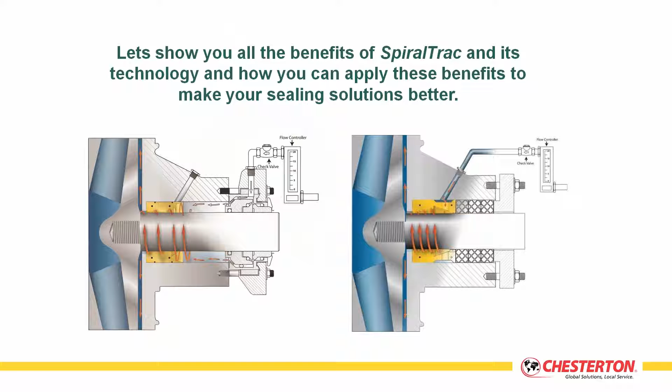So what we're going to start off with today is all of the benefits of SpiralTrac and the technology, and how you can better apply these benefits to make your sealing solutions better for your customers. We'll cover the basic operation of SpiralTrac, talk about flush - when and how much you should be using - sealing options, packing options, and a few preferred materials we tend to use when dealing with mining applications and tough abrasive slurry applications.

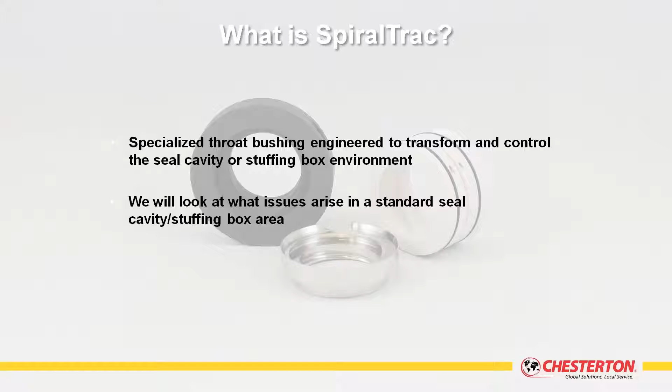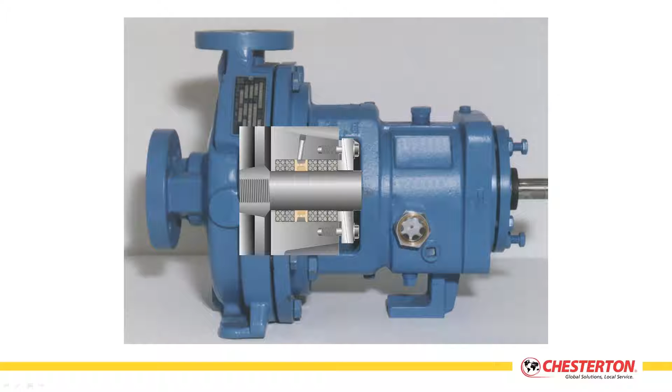So as far as what is a SpiralTrac - when we talk about a SpiralTrac, we like to call it an active throat bushing. It's a specialized throat bushing engineered to transform and control the seal cavity area in and around the stuffing box. We're going to look at some of the issues that arise in a standard seal cavity stuffing box area.

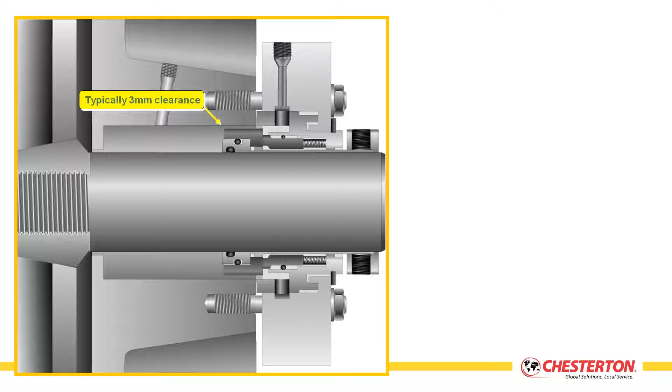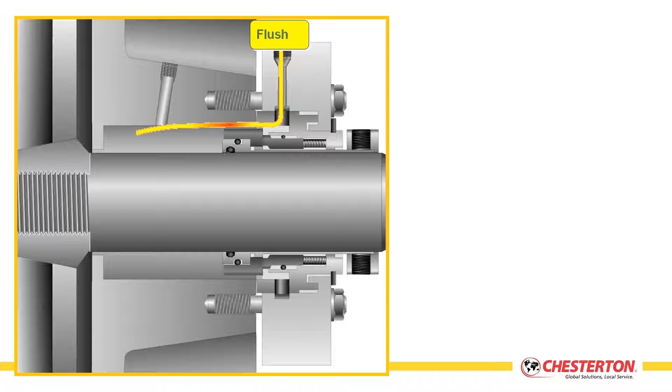This is the area that we at EnviroSeal are most concerned with, the stuffing box area. A lot of times you're taking an application that may be upgraded to a mechanical seal that was previously packed. Some of the issues that arise are that these stuffing boxes are made with smaller cross sections for packing. So when you get your mechanical seal in there, a lot of times there's not a lot of room for circulation inside the stuffing box, whether you're using a single seal, a double seal, or whatever you're trying to upgrade to.

So what are some of the things we're trying to do to help protect these seals in tough abrasive applications? You use a high volume of flush to help keep the seal cool and to try to create at least 15 feet per second velocity underneath the throat at the bottom of the box, to prevent solids and abrasives from getting into the area where they can be harmful to the mechanical seal.

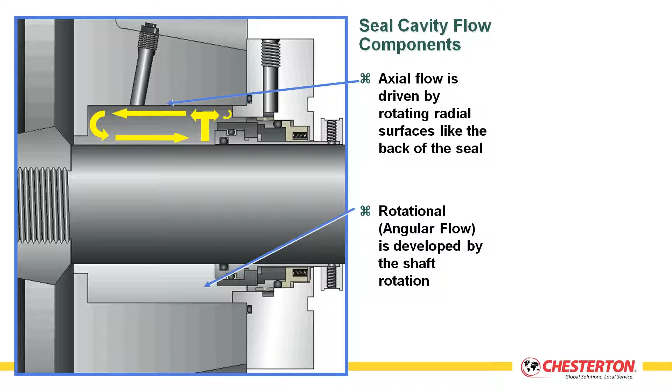So what's happening inside these stuffing boxes is that you have different types of flows going on. You have axial flows and you have rotational flows. These rotational flows are developed from the shaft's rotation. Once the pump starts up, centrifugal force takes these rotational forces and drives them around the stuffing box.

But you also have axial flows, coming off surfaces, like if there's a step in the shaft, the end of the mechanical seal, or maybe the impeller hub extending inside of the box. So these flows are actually directing the rotational flows back towards the mechanical seal, and they're just circulating around inside the stuffing box area.

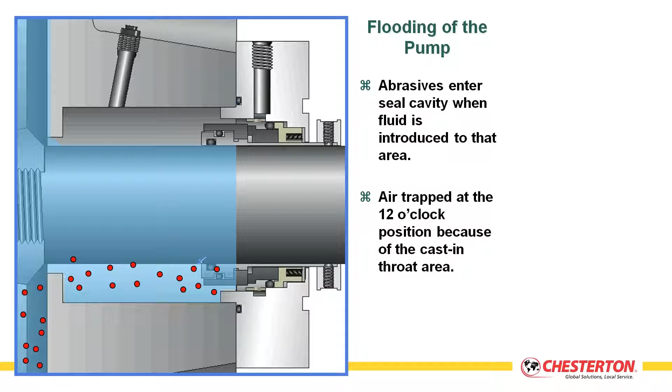So when you flood a pump, getting ready to start it up, what can happen is your abrasives and slurries enter the seal cavity, and you end up with an area that can be airlocked. All of this air can be up to 20 to 30% of the stuffing box area. You can have a big volume of air trapped inside the seal cavity.

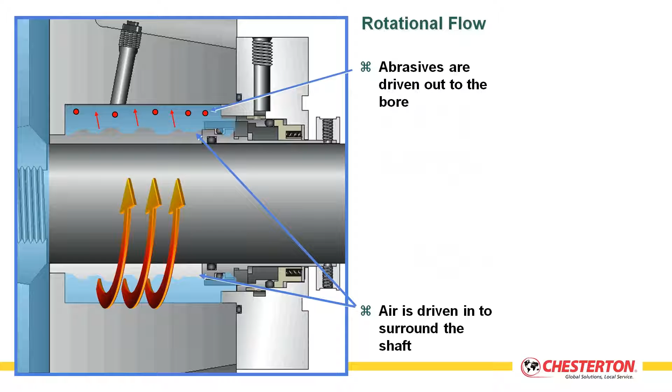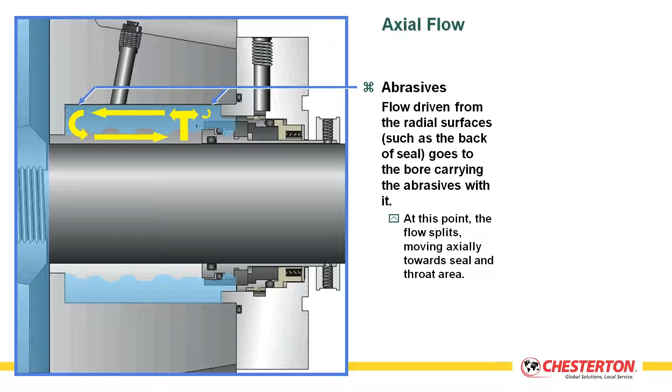When the pump is turned on, the heavier solids are driven out to the bore of the pump, while the air is drawn in towards the shaft area. This is problematic because your elastomers, your O-rings, can end up heating up, not being lubricated properly. So now what we have inside the seal cavity is an excess of air, and solids essentially trapped inside there, circulating around and coming back towards the mechanical seal.

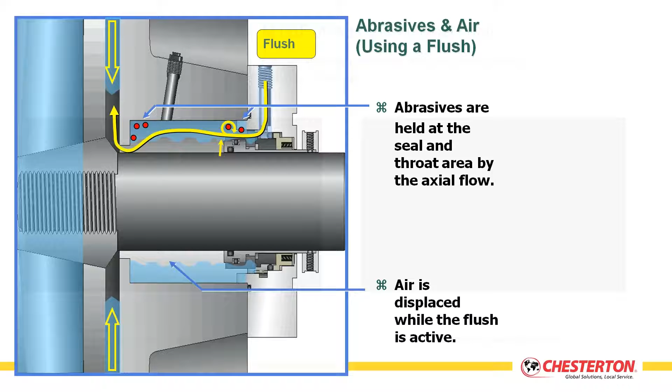So what are we doing to protect here? We're still using a high volume of flush. We're trying to keep the faces cool, trying to keep the O-rings cool, and trying to keep that velocity underneath the throat to prevent more solids from coming in and getting at your seal. But the problem is you're using a high volume of water, and you're not really doing anything to get rid of the solids that are inside the seal cavity right now.

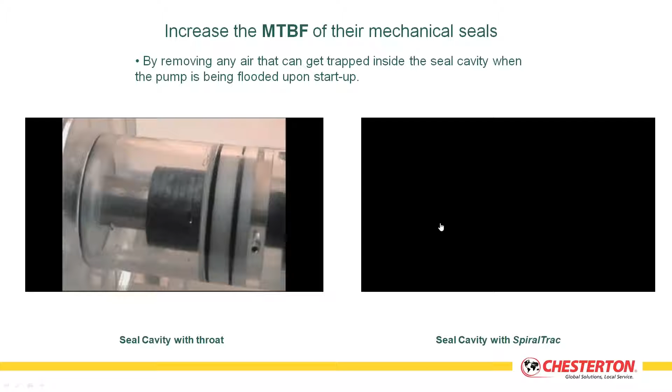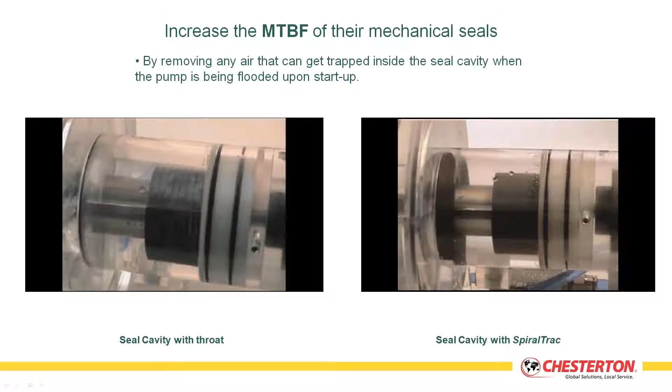I have a couple of videos here on the left. What you're seeing is the seal cavity with just a standard throat bushing at the bottom of the stuffing box, and you have the same situation but with a SpiralTrac impeller-side installation installed at the bottom of the box. With the air vent positioned at 12 o'clock, your seal cavity is fully vented of air on initial startup. So immediately, this is helping us get rid of one of the issues we see with seals failing.

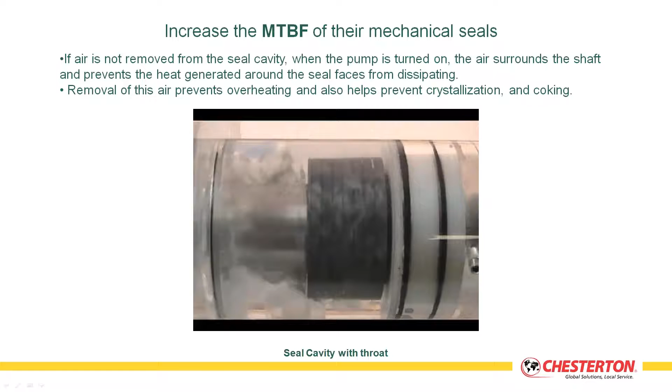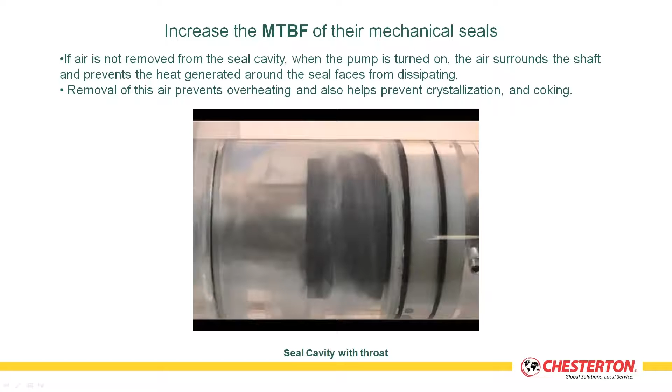Let's take a look at what's going on inside. Now we have a video of the air being trapped inside. What happens when the pump is turned on? All of the air goes right around to the inside, right around the shaft, right around the seal faces, right around the elastomers. So this is not an optimal environment, and this is why we're using a high amount of water in these applications to try to cool things down inside the seal cavity.

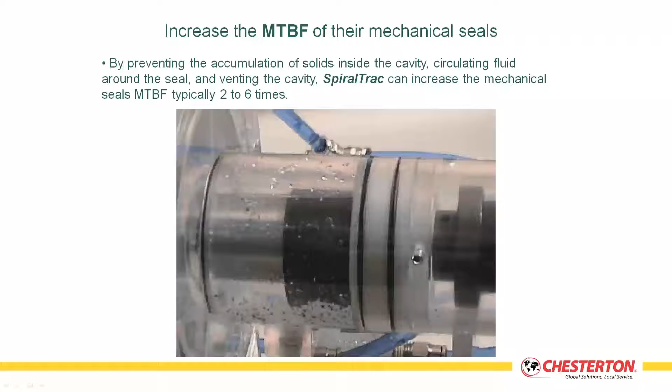Okay. Yeah, how about I take this down? Yeah, yeah.

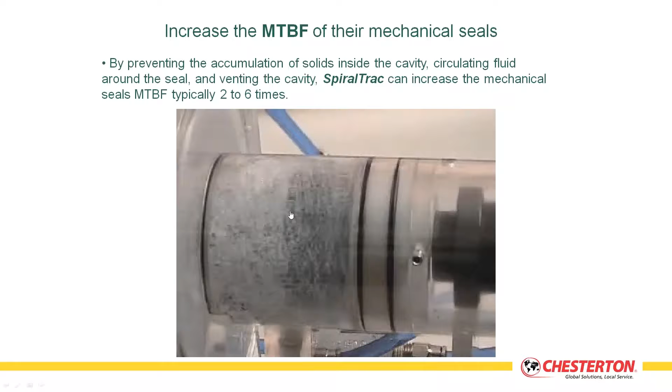So now what we have is your typical application. You have solids that have entered the box, and air trapped at the 12 o'clock position inside the box. The pump is turned on, and you can see the flow splitting off from the end of the seal. The solids are driven back towards the mechanical seal and trapped inside the stuffing box. There's nowhere for them to go.

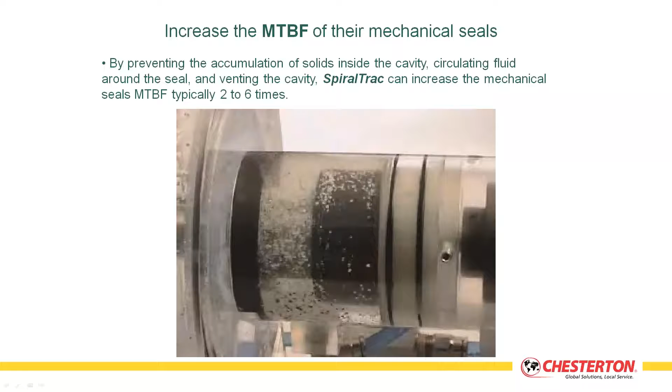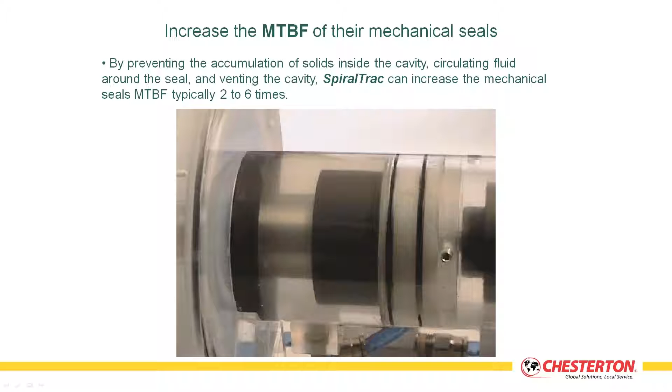Now we're going to show the exact same situation, but with the SpiralTrac installed at the bottom of the box. We've already vented the air upon initial startup, so that issue is taken care of. Now when the pump is turned on, immediately the solids are drawn towards the spiral geometry. We pick up the solids at the largest diameter inside the box, and they're directed through the spiral geometry back out through to the impeller, where there's no harm to the mechanical seal. We're effectively creating an optimal environment for your mechanical seal to operate in.

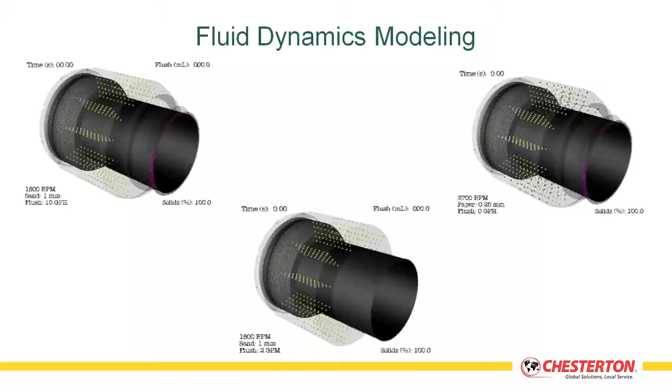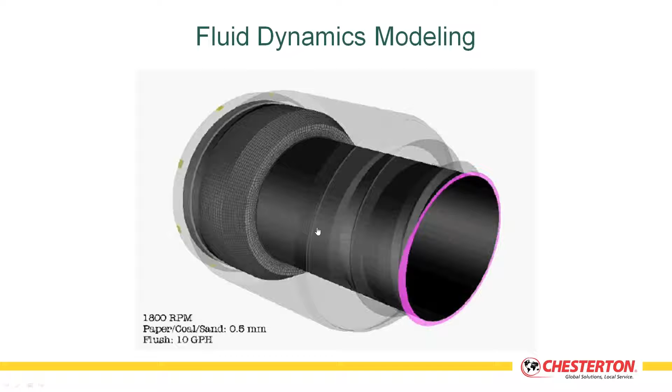Chesterton has some very good fluid dynamic modeling that we've done for different products over the years. These are very good sales tools to use with your customer to show them what's actually happening. Here we have a simulation done at 1800 RPM, using paper, coal, and sand particles, represented by different colors. You can use this to show your customer how the spiral is directing all the solids back through to the volute of the pump, where there's no harm to the mechanical seal.

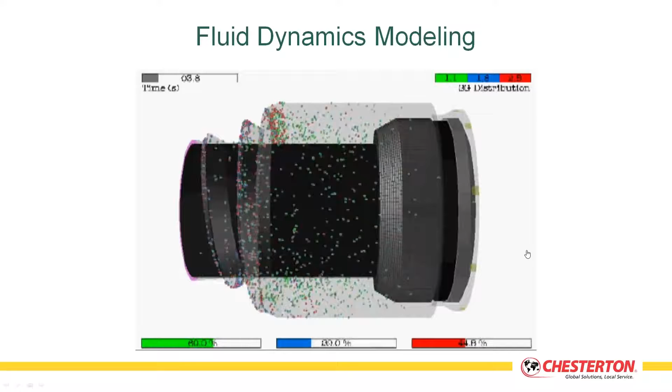As you can see, the pulp and paper fibers are the green solids. They have the lowest specific gravity, so they take the longest to circulate and get removed. The heaviest solids, at 2.5 specific gravity, are driven out of the stuffing box through the spiral geometry the quickest.

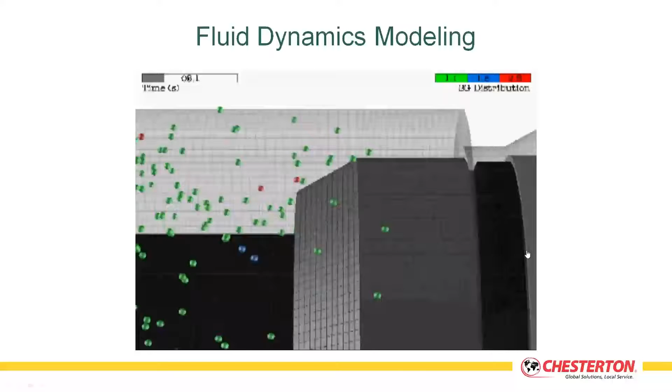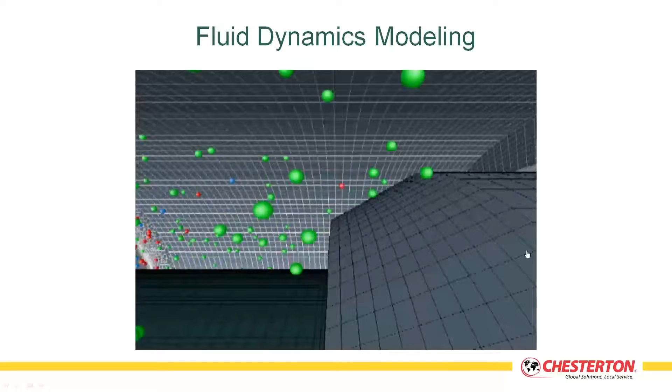Now we're going to trace the path the solids take through the spiral grooving. You can see the clearance from the ID of the SpiralTrac over the shaft. SpiralTrac is designed not to contact the shaft, we have clearance built in. So as this fluid and these solids are going through the spiral geometry, we get a nice circulation of fluid.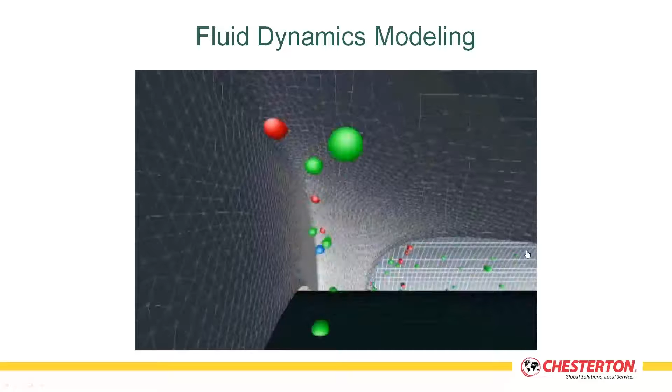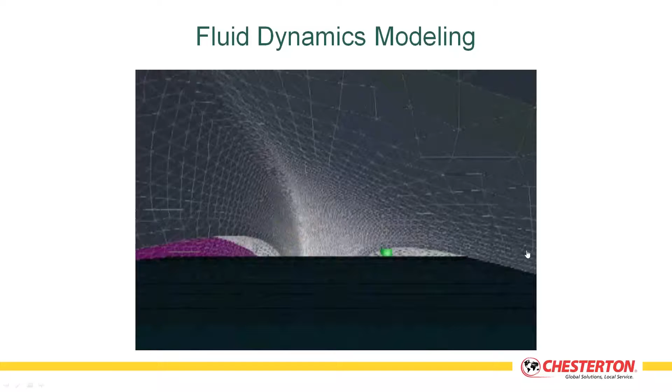Cooler fluids from the process come back into the stuffing box, and that's what helps us run with no flush in some sealed applications. We don't need the flush to keep the solids away from the seal, and we don't need as much cooling from it, because we're drawing some of that cooler process fluid back into the box.

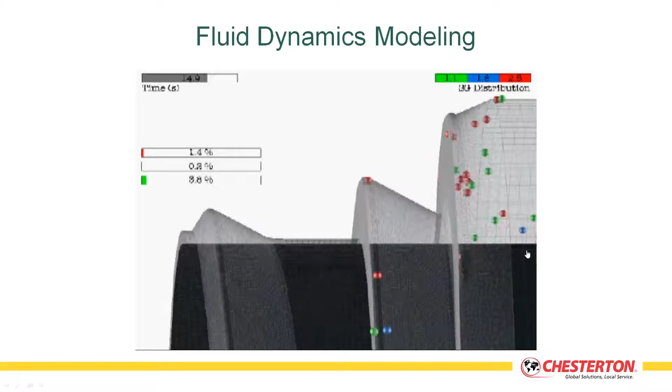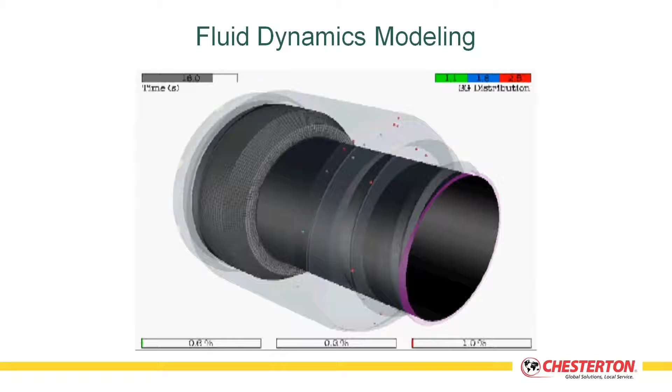Eliminating seal and cavity erosion. In a lot of cases, due to the flush itself having maybe pipe scale, or maybe you're using river water for a flush and you have silt or stuff from the river in the flush, instead of having the solids accumulate inside the seal cavity, we're essentially constantly removing them from the seal cavity. So with a SpiralTrac installed, you're in a better situation, because really, who has totally clean flush?

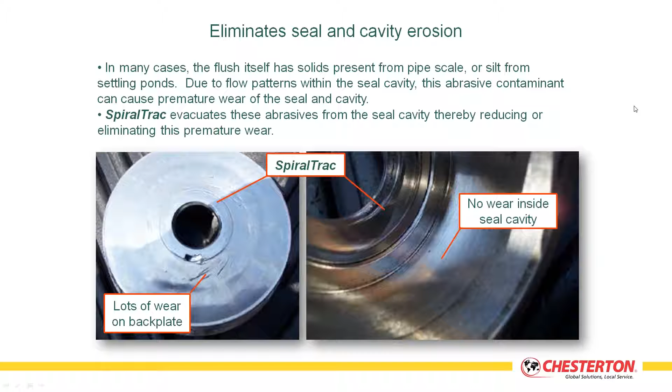To eliminate flush in sealed applications, what we're trying to achieve is a clear, unobstructed path for the spiral geometry through to the impeller side from the stuffing box. When just installing a SpiralTrac resting up against the back plate, we don't recommend using a flush in sealed applications, because we're effectively still removing the solids from the stuffing box, but if you have a tight clearance obstruction behind the SpiralTrac, we're looking for a positive flow of the flush to help push those solids out underneath when they get stuck in the exit groove on the impeller side of the SpiralTrac.

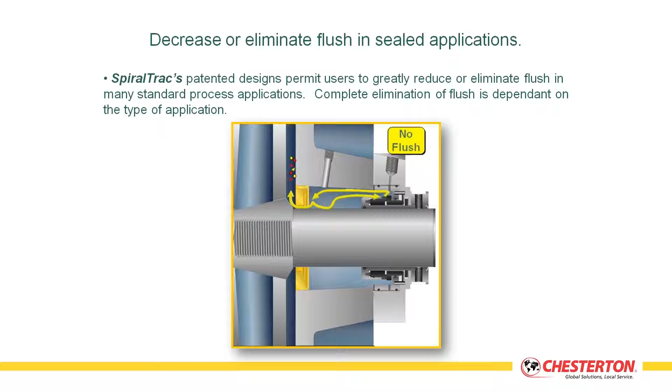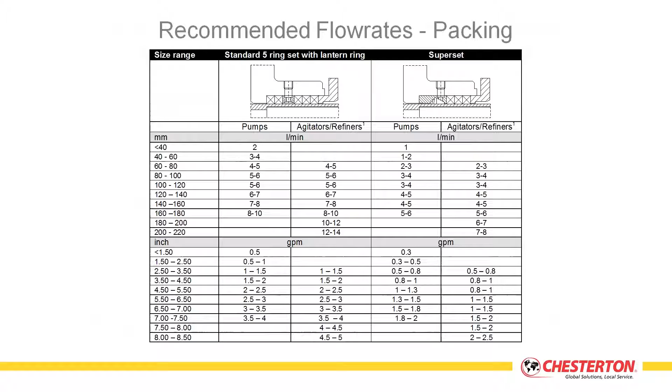Flush is a hot topic. How much do we need? How much can we reduce? We've worked with Chesterton and we have some general guidelines based on shaft size for how much flush you should be using. Patrick, if you're still listening, some of these rates you'll see here are significantly lower than what your customer is currently using. So when you come to us for an application, we can look at it, see what we're trying to accomplish, and give a recommendation about how much flush we should be using. What's key is that we recommend at least 15 psi pressure flush over stuffing box pressure.

So we can ensure we have a positive flow going through the stuffing box. What we don't need is to necessarily have that high rate. So we recommend having a flow meter on there, so we're able to see how much we're taking the flush down to. But we just want to make sure we maintain a positive flow going through the box.

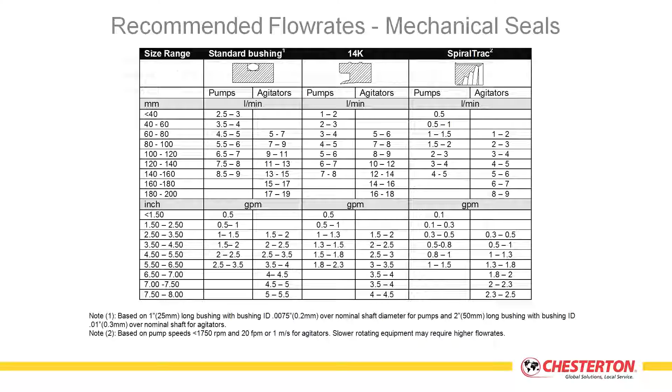Based on the information you're getting from a potential customer about their needs, before you go out and present a solution to them, it'd be nice to prepare a few options. So what are the key questions you should be asking your customers?

We want to know: what are the issues you're having with your current sealing solution? What are your expectations? How much life are you getting from the sealing solution you're currently using? When the seal fails, what's the typical mode of failure? Are we talking solids accumulation? Is there excess heat being generated? Do you have a product that, after it sits for a little while, is crystallizing when exposed to air? Do you have alignment or shaft runout issues? Do you have issues with your flush line itself?

As far as the flush, are you using a flush? How much flush is being used? What's the cost of the present flush water usage? Are you looking to reduce? Is that key for your customer? Are they really looking to reduce the amount of water they're putting in there? How much are your effluent treatment costs? How much are you treating after the fact? So the less water we end up putting into an application, in a lot of cases, is less that has to be taken out at a later point.

Is your customer open to doing machine upgrades? We'd like to know that. Is the pump going to be in a shop where we can take it and do some basic machining to get the impeller-side installation into the SpiralTrac, which would be our optimal solution?

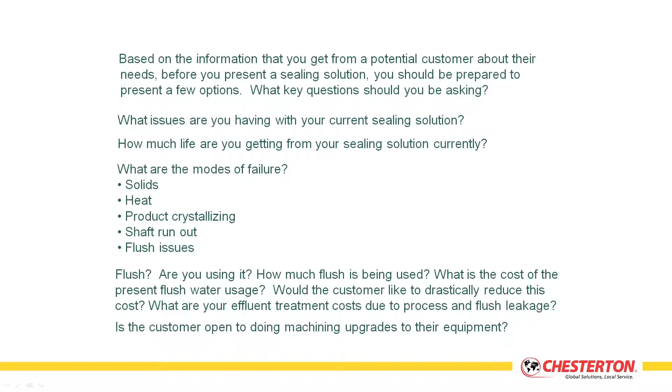As far as versions of SpiralTrac, when we're talking about mechanical seals and recommending a 442 split seal, we go with the version F SpiralTrac. You're basically selling this type of SpiralTrac with the same benefits you're trying to sell with your 442 seal. It's split, and can be installed in the field without having to disassemble the pump. It's a very easy installation. It's axially split and pinned. It's installed over the shaft and pushed down to the bottom of the box. You install your split seal on top of that, and you're ready to go.

Our version N, D, and C: we use version N in general solids, in your general slurries. It's a single spiral design. The version D is our double spiral design. We use that in fibrous applications, applications where your product can be held in suspension. The extra spiral helps generate more flow inside the seal cavity.

And we have the version C as well. We'll use that in applications where you might be using intermittent service, and maybe you're letting the pump sit, maybe the product can crystallize or harden. What the C does is have a drain at the 6 o'clock position. So when you drain the volute, there's no product left around the seal faces that can harden or crystallize, so that when you start back up at a later time, you don't end up with a failure.

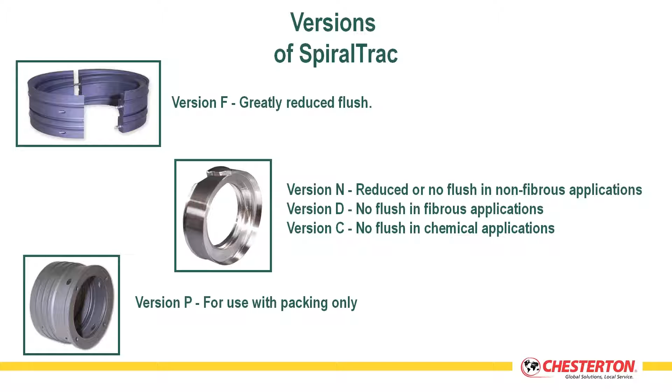And then we have the version P, which we use with packing only. I'll get in depth a little bit more on the version P as we go further.

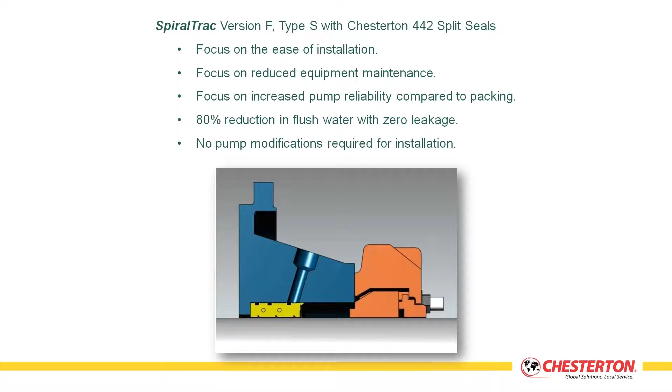Here's the version F we talked about. We're using this in conjunction with the 442 split seal, and all your selling points on this are similar to what you're doing with your 442. Focus on the ease of installation, reduced equipment maintenance, increasing pump reliability, no modifications required at all for this installation, while drastically reducing the amount of flush that the application needs to run successfully.

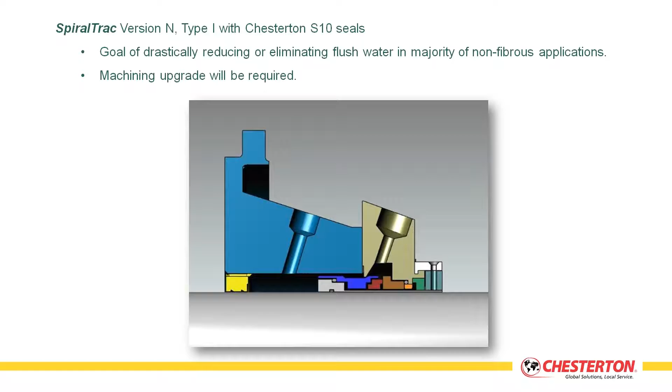This is a visual of how your impeller side installation is going to be mounted up. We're going with this when your goal is to drastically reduce or even eliminate the flush water in the majority of your non-fibrous applications. Typically, unless you have an open bore, you're going to have to do some slight machining to get this installed in the bottom of the box, but that's no trouble at all. We provide upgrade drawings for you, letting you know what machining has to be done to the stuffing box.

Flip through some of these. I'm going to go to...

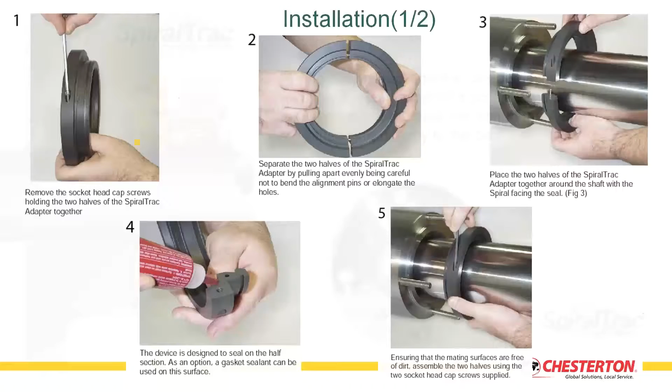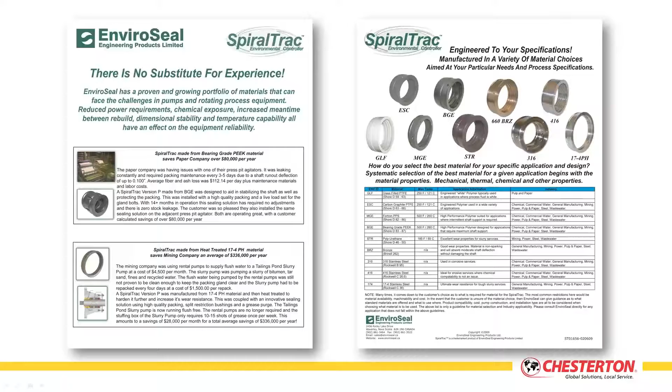I'm going to talk about materials now. What materials? This is a big question we get, especially for these abrasive applications. What materials should we be using and where?

We have customers that use our carbon-filled PTFE material in slurry applications, but the thing is, we need to be sure that we have a clean, reliable flush, because if we're cleaning out the stuffing box and your seal water is clean, we're not having to continuously run slurry through the spiral geometry, so we can get away with carbon-filled PTFE in some applications. But for the most part, the material of choice for our abrasive applications is our 416 stainless steel. Has a Rockwell C of 26.

If there's any chance that there's any chemicals or any nasties inside, then where we'd like to go, our best material for our slurry applications is our 17-4 stainless steel. We actually heat treat the 17-4 material if it's needed, and what we can do is take the Rockwell C of 36 and take it to a Rockwell C of 43 to 44 when we use this material.

Another material that we use in the mining industry in these abrasive applications is our STR material, and a lot of you are probably familiar with it. It's Chesterton's AWC 800 material. We manufacture that single split. It's very flexible, but it is also very durable and has excellent wear properties for slurry applications.

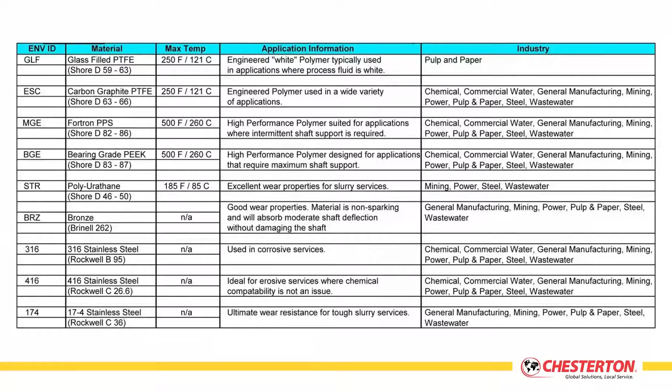Another material that we'll use that is popular is - if I mentioned earlier that SpiralTrac is designed to not contact the shaft, we have built-in clearance on the ID - but when we use materials like our bearing grade materials, such as our MGE, our bearing grade PEEK, or our 660 bronze, bearing bronze, what we do is we tighten up the clearance over the shaft to a few thousandths of an inch, and then if there's any shaft run out, if there's any shaft deflection, what we're doing is helping absorb that shock. So in addition to being able to help reduce the amount of water, being able to evacuate solids from the box, we're also providing some extra stability inside the box for the application.

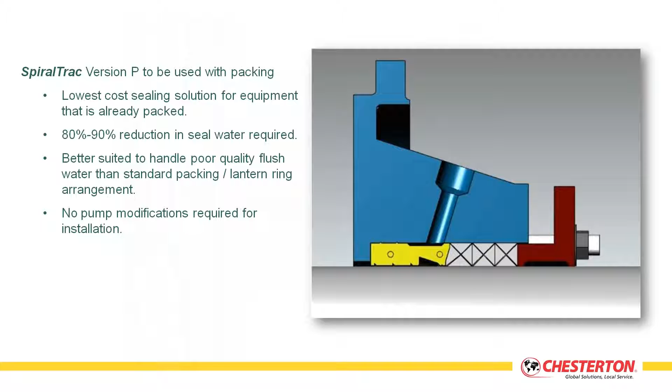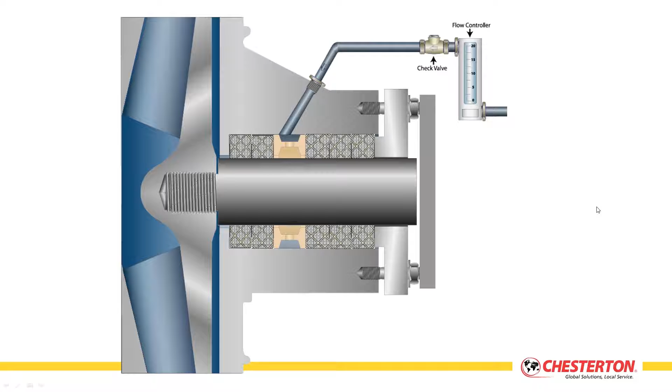The version P for packing, it's the lowest cost sealing solution for equipment that is already packed. We're reducing up to 80 to 90% of the seal water required. And with the version P, you're a lot better suited to handle poor quality flush than a standard packing and lantern ring arrangement. And there's no need for any modifications with the version P at all.

So in this instance, if you're using water from the river, or if you have a settling pond that you're pulling a tailings pond, maybe you're pulling some flush water from, any solids that are in your flush line in this type of arrangement, you're going to end up embedding them underneath these packing rings right off the bat. With a SpiralTrac version P installed, if you happen to have some solids or debris coming in through the flush line, they're going to be exited back through the impeller side instead of being embedded underneath the packing rings.

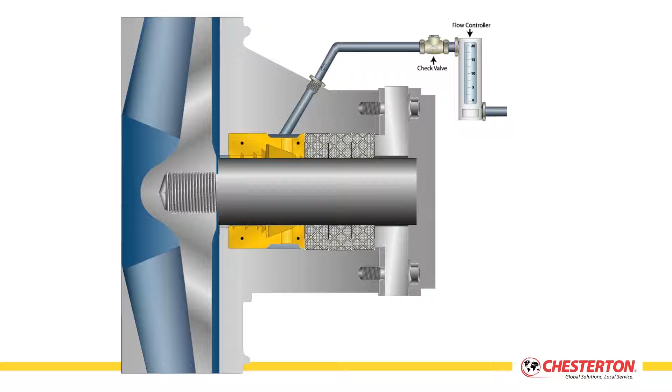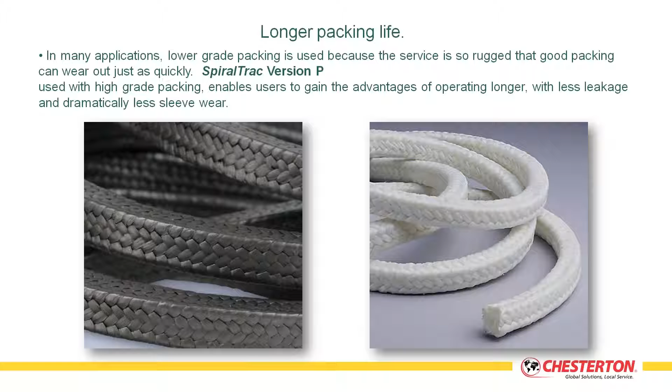Typically, we replace everything from the lantern ring down, and we require a minimum of 3 rings of packing above for the SpiralTrac packing version. And again, we'd like to see - it's recommended that you put a flow controller and a check valve on the flush line. The check valve is nice, so if you ever have a decrease in your flush pressure, you're not going to have a bunch of product coming back through the flush line.

Some of the benefits of having the packing version installed is that you have longer packing life. Instead of the solids getting embedded underneath the packing rings, what we're doing is keeping a nice area for the packing to seal on the shaft.

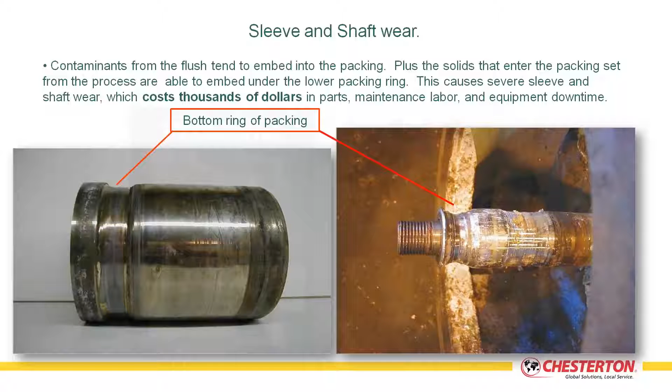Less leakage and cleaner leakage at the gland. SpiralTrac is going to enable you to control the leakage to a drip rate.

Shaft and sleeve wear: because the bottom packing rings aren't going to run loose, having solids from the application come back underneath the packing ring and start scoring the shaft, we don't need as much gland force to seal the packing rings above, because we only have 3 rings and we're not trying to squeeze down to seal those bottom rings at the bottom of the box.

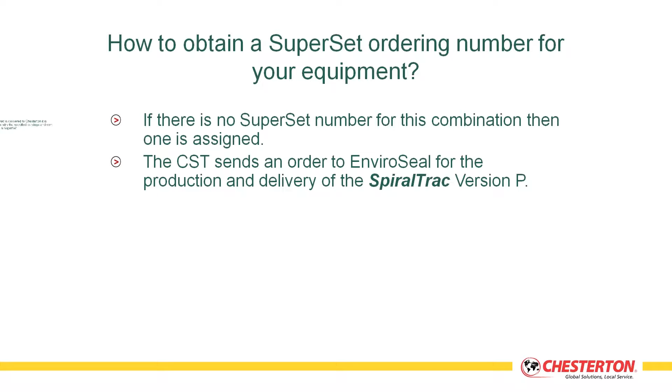Chesterton has a lot of high quality packings out there. One of the best programs that we have with the SpiralTrac is to have them sold in a SuperSet, pre-cut rings to go with the SpiralTrac version P.

Very easy: you come to us, you get a SpiralTrac part number, we send the information on how many packing rings, of what type of packing and what size. Chesterton will give you a unique item number, so that unique item number will get you the SpiralTrac and the cut rings of packing for your customer all set.

I have a lot of success stories embedded at the bottom part of this presentation. I'll just go over one here that we've seen.

This was done earlier in 2016 at a nickel mine in South Africa. We had a Warman pump, and before we got involved, they were getting 7 days out of a packing set. Each time, because of lost production, repacks, and labor for the workers, each repack was costing them over $7,000.

We installed a SpiralTrac with 3 rings of Chesterton 1830 SSP. The sealing solution cost them $12,000, but now they're getting 7 weeks in between repacks. So a quick ROI after 7 weeks saved them over $40,000.

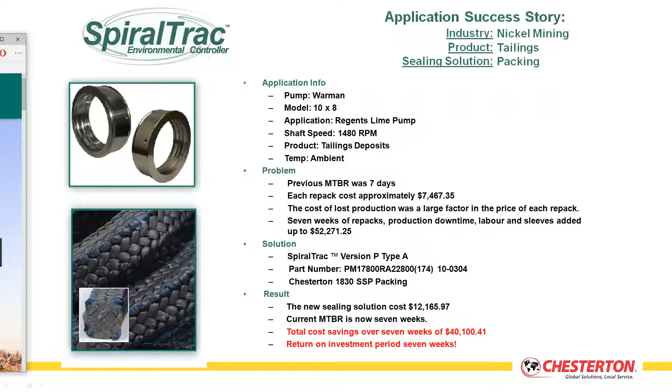So it's very important for documentation. The more you know about what your customer's doing, how often they're doing repacks, the easier it's going to be to do a proper ROI for them after it's all said and done.

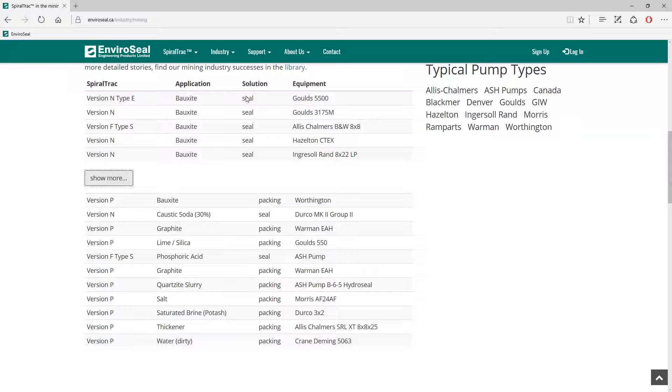All right, hi folks. Hope everybody's enjoying their Friday afternoon, or depending on where you are in the world, night or morning. So if you can see the website right now, or if you have any issues, Christine, just let us know in the chat.

What you should be seeing is our home screen for the new website. Basically what I'm trying to focus on for now is if you go up on the industry selection page, and since this is a mining focused webinar, if you click on the mining part and scroll down, you can see a couple of applications that we've been successful in the past with the application solution and the equipment that was used.

On this page there are some sample success stories that we have on the website with a little gallery of SpiralTracs in different materials, different shapes and sizes. In fact, if you refresh that page, it's always going to be something different, because we have a lot of these devices on the website.

One thing that's a little more important: if you go to the support page, first of all, the news and articles section, we constantly update this with new information about SpiralTrac, or if you want to quickly learn or just read an article, then you can go through these, and it's the easiest way to learn.

If you come down to the literature section, right off the bat you can see all our important brochures at the top with some ordering information. So if you're ever looking for an order form, either you just download it from here, or if you search in the search bar, filter it down to order form and click search, then you're going to see all order forms.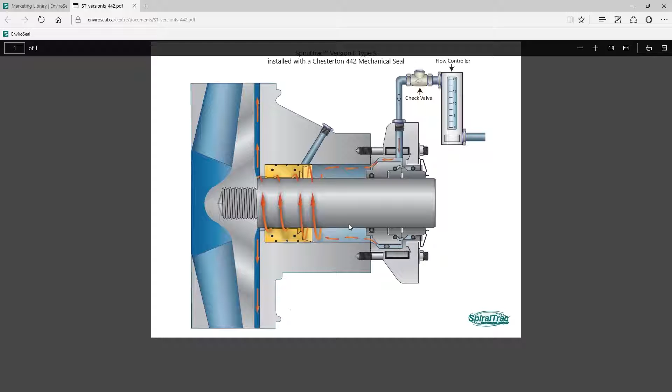For example, here you can find illustrations too. So if you're looking for version F-Type S with a 442, you can just download an illustration. It's all on the website if you want to present it to your customer. Then in the Boost Your Sales section, we talk about the demo pump and some sample devices you can order, the version P display. So this information is all available to you.

So if you sign up for the Distributor Center, this is a constantly updated hub. So yeah, basically that's about the new website, and we hope you guys are going to sign up.